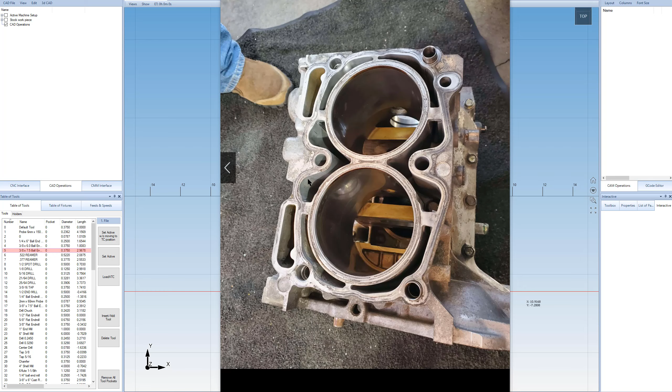So before we talk about how to program the 2D geometry, let's show one common way that's probably easier to do if you have a machine and a probe, but may not be as flexible.

And that is to probe - basically put the tool inside one of the water jackets and just tell it to probe on the XY plane, and it'll go around and collect points along there.

So that works. Basically what we do is insert the instruction called probe profile, and then we select the probe that we're going to use. We'll just select that one.

And let's just open this up here. Okay, and it's all coming back to me now.

So what we have to do is come over here to the 3D CAD and make a sketch. Our 2D sketch defaults to the XY plane, so we can leave that alone actually.

We could position this in some other location if we wanted to, but the standard XY plane is okay for now. And then we come over here to our point consumer, click on that, and we are going to put this into a 3D CAD sketch.

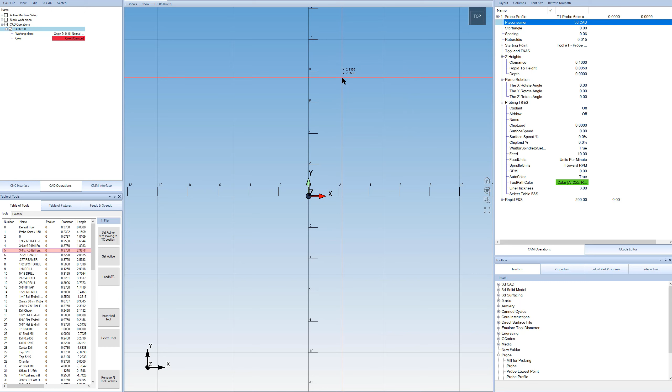So we click on the 3D CAD, then we click on options, and this will allow us to decide where we want to put it.

We'll put it in that sketch 0, which is what we just created over there. So we hit OK, then hit OK again, and now you can see that the point consumer is sketch 0.

So just to briefly explain what point consumer is and all of that - you have a point producer and a point consumer. Clearly we're going to probe, so the probe is what's actually producing the points, and the sketch is what's going to consume the points.

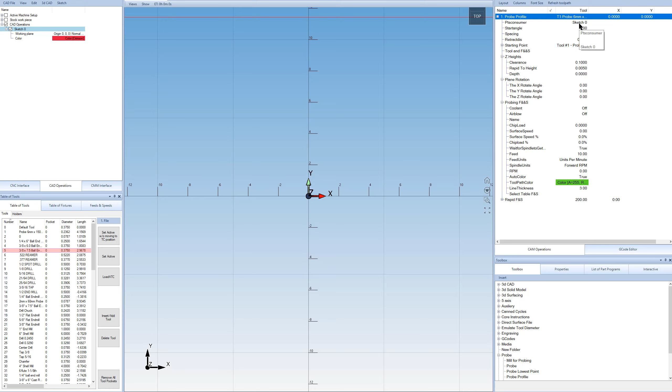So the probe, again, is the producer, and we just have to tell it who is going to be the consumer. If you think about it, this is kind of a nice way that you can connect any point producer with any point consumer, right?

So the sketch doesn't know that the data is coming in from a probe. It could be coming in from any other source or any other producer. I talk more about this in detail in other videos, so we'll leave it at that for now.

And then after this, all we have to do is just move the probe into one of the water jackets, and then tell it where that location is that we want to start, right?

So probably our deck surface is going to be 0 in Z, so we don't want to change that. And then we can just change the XY around to wherever the center is of that water jacket.

And then once we get that, we can just hit cycle start. And then every point that it probes, it will basically just go around the profile and probe 360 degrees around.

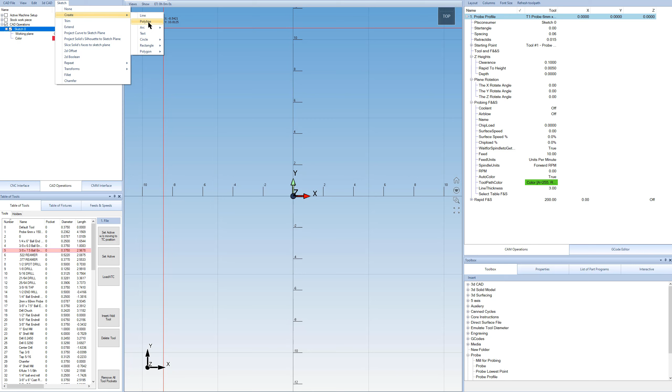And every point that is produced will then just go into the sketch, and it will actually probably insert it as a polyline, I believe. So then you just have a continuous line that's just a series of points basically. Okay, so now let's go ahead and talk about another way to do it, which is actually to program this data directly.

So let's come over here to 3D. Let's go ahead and make a new sketch again, and let's just look at our picture here. What I would probably do is set up my XY0 in the center of the two cylinders, so that's the X direction in the center of the two cylinders, and then the Y direction also in the center of the cylinders. The only reason I'm doing that is to make it easier to mirror things. Basically, the whole block is going to be mirrored over 0 in X and 0 in Y.

You could pick one of the dowel locations, which is probably better. We would probably do all this work at 0,0 in the center, and then maybe move it to make our origin over top of one of the dowels. But that's a detail, it's just not that important. For now, we're just going to pick the center of the block to make it easy.

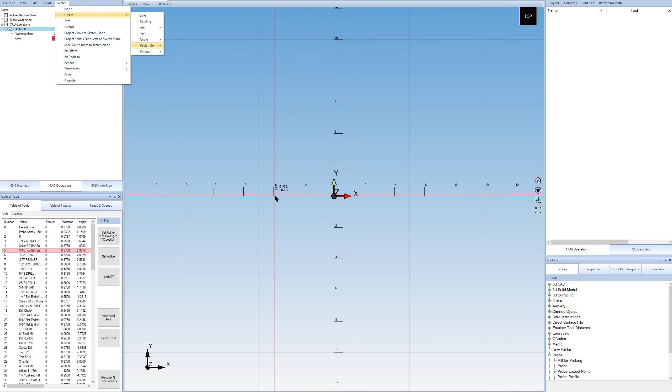So I'm just going to program some of this geometry. I'm not going to get anything exact because I do not have exact dimensions. I'm just going to kind of guess on some of this stuff. So we're going to make a circle. We'll come over here and just kind of drag to -4 in x and +4 in x, okay, and just make 2 circles. So that gives us 2 circles over here.

So we'll go ahead and type in exact dimensions. We'll do 0 in y and something like that, and then we'll make the radius 3... I don't know, we'll pick 3.5, okay. And I know these blocks are all going to be metric these days, but I'm just going to do everything in inch for now, just because we're trying to explain the concept here.

So now we'll make 2 more circles. We'll make one kind of down here like that, and one up here like that, and again we're just going to make these mirror images of one another. So we'll do a 0 in x, okay, and we'll do -3.5 and +3.5. And the radius, we'll go ahead and make it 1/2 inch radius. Okay, so now we have something that hopefully kind of looks like our 2 cylinders and these 2 head bolt holes.

So we'll come over here and just name this sketch. Let's call it cylinders and head bolts, okay. And now we'll make another sketch, and that's going to be sketch 1 down here. Now we're going to say water jacket geometry.

So what I'm going to do is start off with the information from the previous sketch, and the way we do that is we will say project a curve to sketch plane. So essentially—oops, hang on one second here. Yeah, I had the wrong one selected, so I have to make sure that I select the one that we want to work in. Had I left this one selected, then we'd be still creating geometry in there. We want to definitely select our water jacket geometry, and we say project curve to sketch plane.

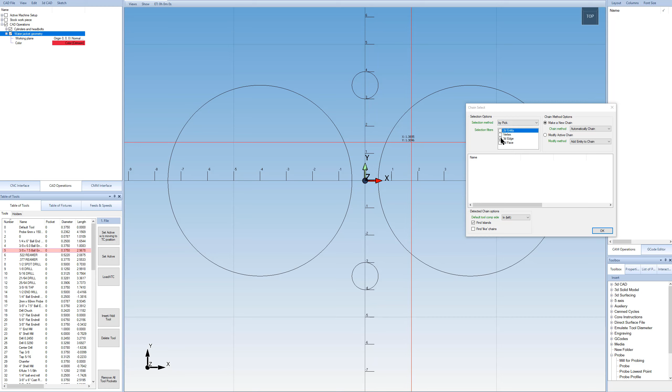And this is almost exclusively used when we're projecting 3D geometry to a 2D plane. So it defaults to only a 3D edge we're projecting, but here we're taking 2D geometry and using that, so we have to just make sure we click on the 2D entity option there. And then we're just going to select our geometry.

Okay, and I know it's kind of weird because now we have essentially 2 copies of the same thing. Right, so if I turn off both of these, I have nothing on the screen obviously. If I turn on the cylinders, it's identically the same as the water jacket locations. But we're going to modify this a little bit for the water jacket.

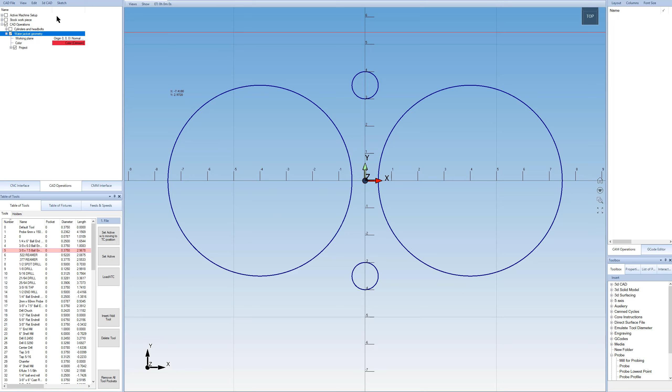So we're going to come over here and just say a 2D offset, and we're going to offset all 4 of these. And let's just say that we're going to offset that a 1/4 of an inch, I guess—let's go a little more, let's go 300. So essentially what that's saying is, since this is going to be the geometry that we're going to create the water jackets with, that's how much thickness we're going to leave between the cylinder and the water jacket. Okay, so kind of imagine maybe 300 thousandths in there, something like that.

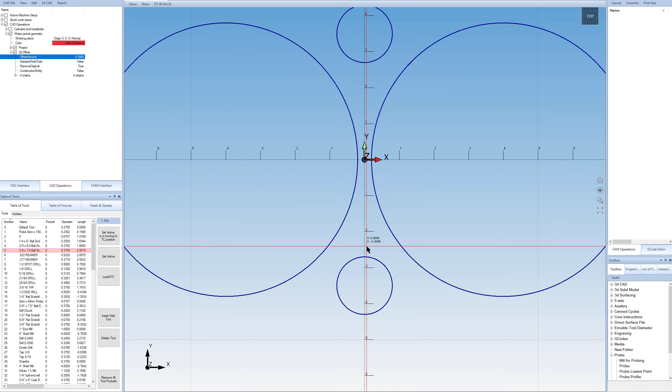Okay, so now we can just go ahead and start creating some geometry here. So maybe I jumped ahead a bit - I want to explain that we're going to program this center water jacket to start off with here.

So if we look at where this starts over here, it's just a little bit to the right from the center of the cylinder in the X direction. I know this is a little confusing - our picture is oriented 90 degrees relative to our drawing, but that's okay.

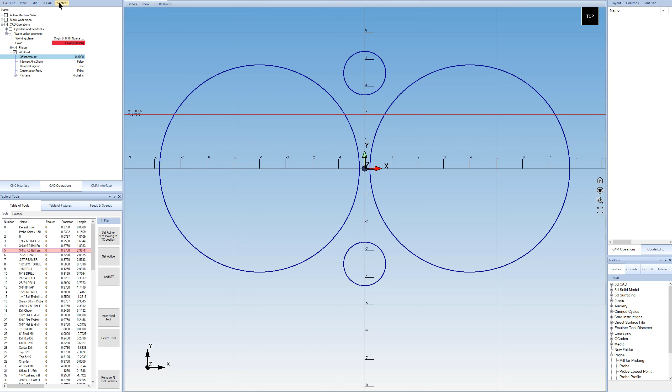So we'll come over here and say create a line and do something like that. I'm just kind of faking it, coming up with something that's sort of close. And we'll make another line over there. So that represents this, although that's kind of on an angle - that's okay for demonstration.

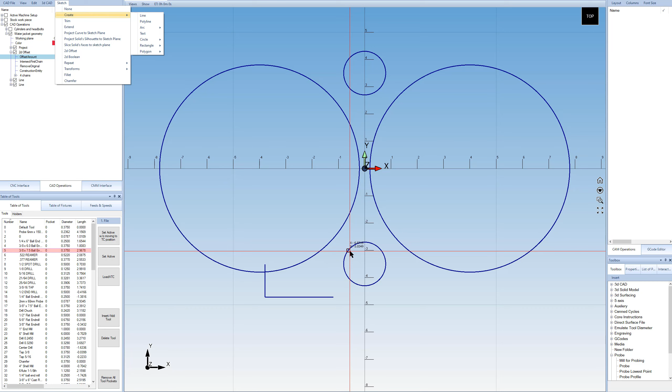So now, if you notice when I hover over top of a circle, it gets a point that's on that circle, and then if I click one line, you can see we're making a tangent line to that circle. So we'll click on that and then click right over here. Okay, that's good for now.

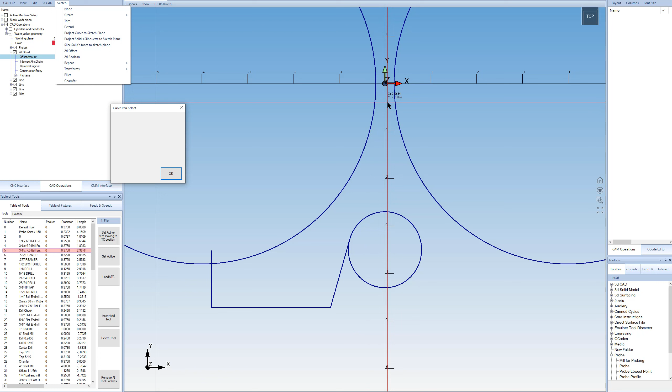Let's go ahead and insert a fillet. Let's change our fillet radius to 1/2 inch and put a fillet in right there. Okay, that's good.

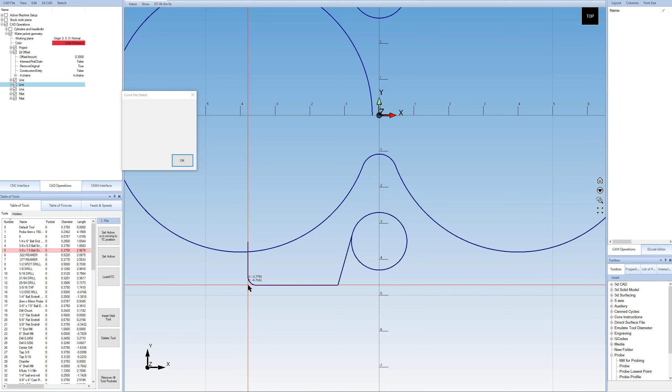And let's make another fillet that is going to be smaller - this will be like a 1/4 inch fillet maybe. And just do that right there and right there. Okay, so that's good.

Now let's do a trim. Let's trim out some of this geometry that we don't need. We'll leave this half for now. And actually we don't need this circle at all, so we'll just go ahead and get rid of that.

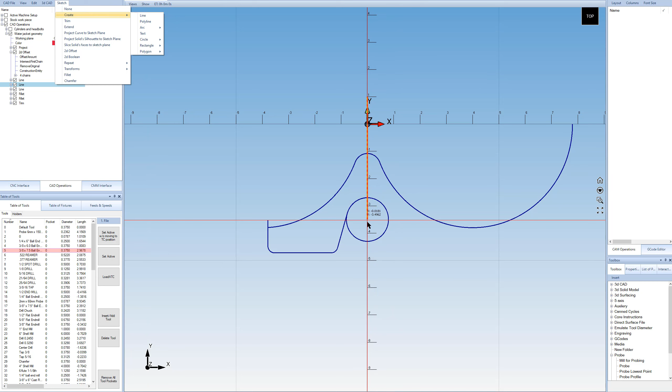Okay, so now I'm going to create what's called a construction line. Essentially this is just a line that's not really part of our geometry - it's used to help us create our geometry. So I'm just going to make a line that is at 0.0 in X. And what this is going to do is allow us to trim our entire drawing to only keep what's on the left side.

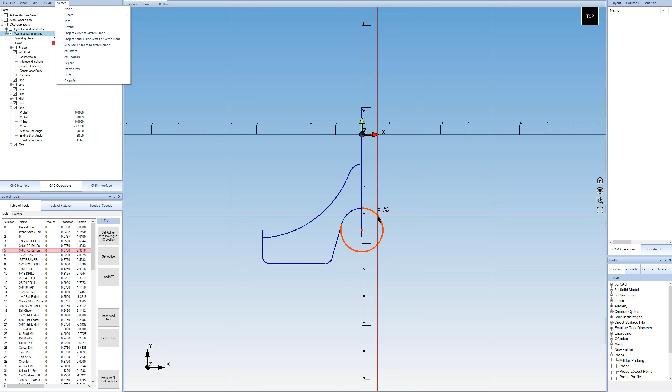Okay, so we'll trim and just trim this away, all of this, and most of that circle there. Okay, so now we have something like that. And now we're done with our construction line, so we can just get rid of that. That looks good.

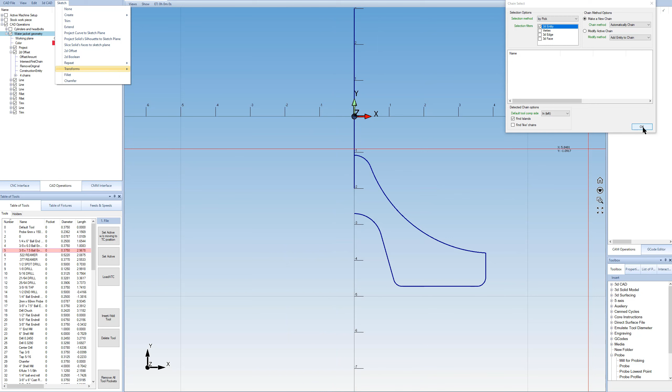So now we'll come over here and do a mirror operation. We click on the mirror, and we'll just click on that right there, and you see that mirrors it over. There's an option inside of the mirror - quite often you want to remove the original, but in this case we want to keep both sides. So there you go, that kind of looks like our water jacket.

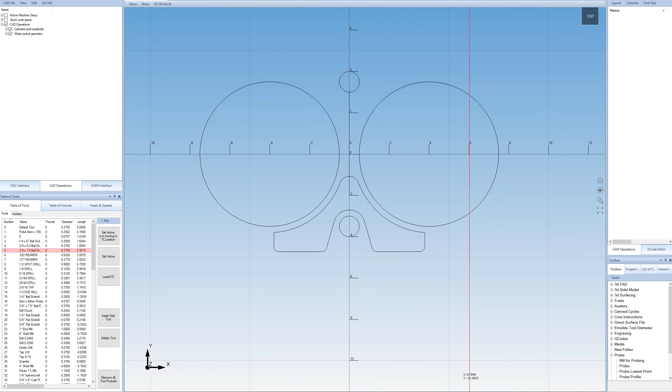Okay, and let's turn back on our cylinders there. So now I'm just going to jump ahead - we're not going to worry about these other locations. Actually, let's go ahead and do this top one because it's easy. We already have the geometry done, all we have to do is mirror it over.

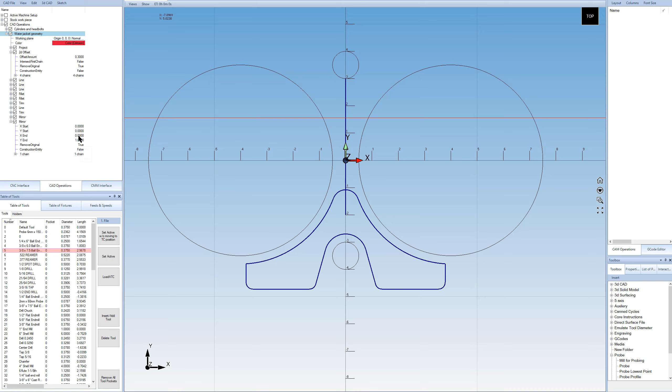So let's do mirror again, and then just select any of these here. In our second mirror operation, we're basically defining a line that we're mirroring over. So we're going to change the x to be 1 in the end, something like that. Now it's a little confusing, but just imagine it actually draws that line there.

You can see this is drawing a line from 0, 0 over to 1, 0, so in this direction in x. So that's our line that we're going to mirror over - all of our geometry just gets mirrored over top of that line.

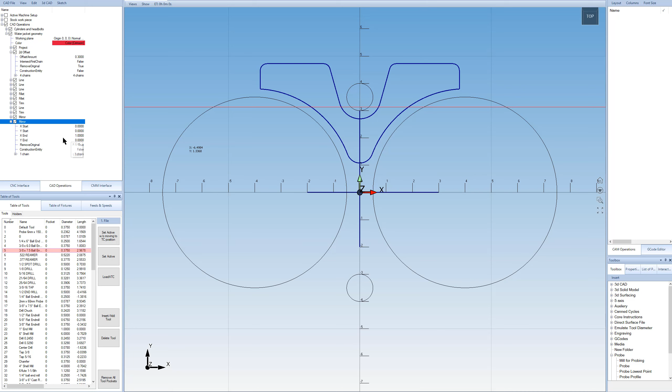And we'll probably improve this to make it a little bit easier to select that line that we're mirroring over, but for now it's not that complicated - if you understand it, you can definitely use it. And then of course we don't want to remove the original again.

Okay, so now we're going to move this into the 3D world a little bit. I'm not going to program any of the outside details here, because we simply don't need that to make these inside inserts for this application. So on the cylinders and head bolts, I'm going to make a 2-corner rectangle that goes around the whole thing, representing the outside of our block. We could fill that in with more detail, but we don't really have to.

So then I'll come over here to our 3D area. First off, we have a decision to make: do we continue working in 2D, or move into the 3D world? I just like to go into the 3D world—it makes things easier, I guess, and you can visualize things better. So I'm going to do that. You could skip this and just do everything in 2D.

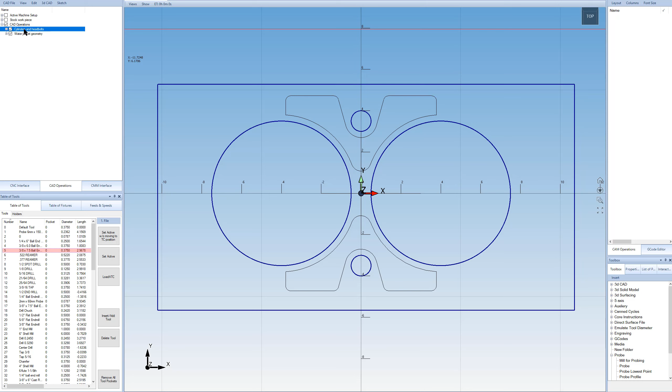Let's go over here and extrude the 2D sketch into 3D. We can click on the outside there, and now we get everything that was inside our cylinders and head bolts. Yeah, that looks good.

So let's make that extrude a little bit bigger—let's just go down 5 inches, something like that. And let's extrude out our water jackets.

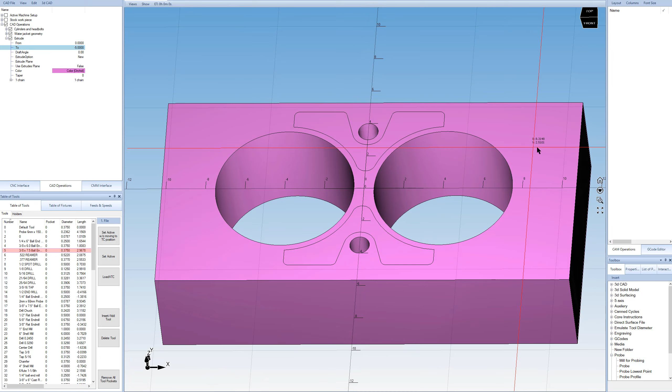Now, if you notice, it didn't pick our water jackets to leave those removed from the block. That's just because it's in a separate sketch. Typically you'd want to pick everything inside the same sketch that you're extruding from, so we have to explicitly tell it that we want to extrude these water jackets out. We'll click on that and then click on this.

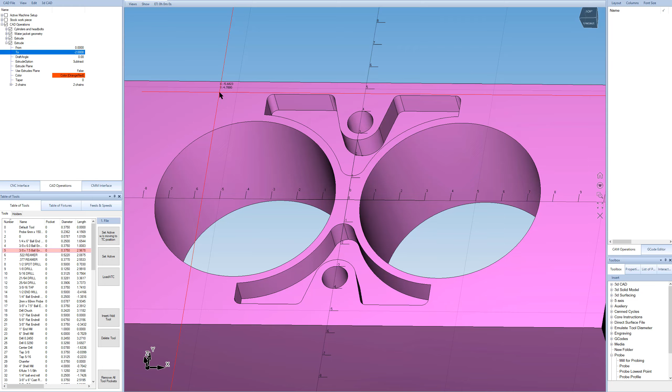Okay, and now the second extrude defaults to new, so we're going to change that to subtract. And yeah, that's kind of cool—see, this doesn't go down all the way, so we can decide how far down we want to go with it. I don't know that it really matters, but we'll leave it at 2 inches there. Okay, so that looks good.

So let's organize this a little more. Let's add a new part folder. We're going to say that this is the block, and we'll take these two extrudes and move them inside our block folder using move into folder. Then we can just turn our 3D on and off.

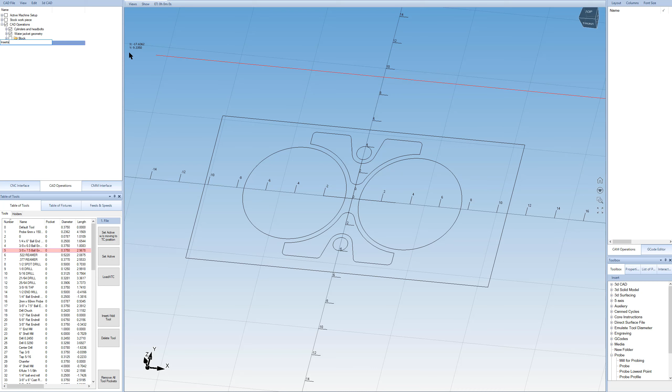And let's make another folder here, and we're going to say this is going to be our inserts. Then in our inserts folder, we're going to again do another extrude and select this and this. So now we have our inserts in one folder and our block in the other.

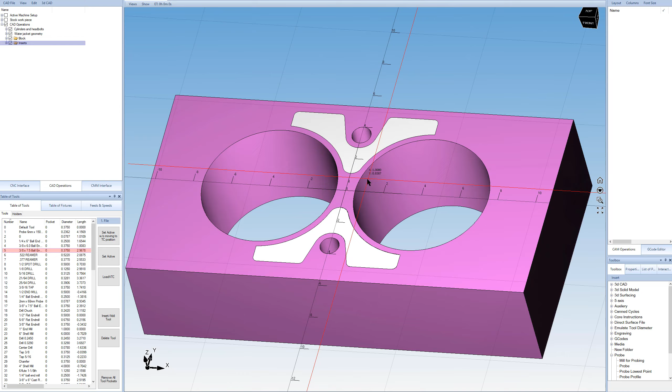So now we can actually just make these—you know, for the inserts, we might not even want to display two of them. We might just want to display one, because we really only have to program this one time. And since it's all mirror imaged, we can use that same program to cut this one out down here. Okay, so I'd say we pretty much have all of our geometry done.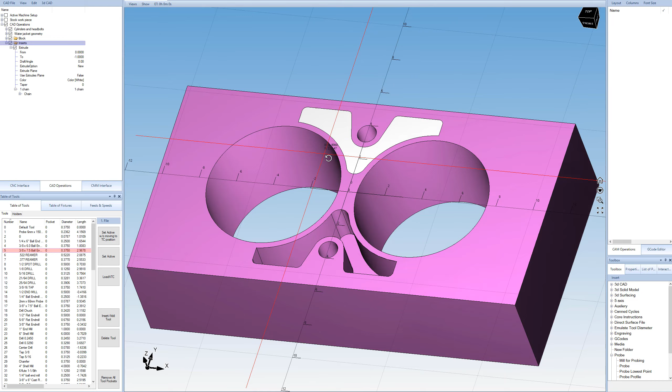We can move on to making a toolpath and then cut this. And before I move on, I'm going to make sure we save this—always want to save.

The left side of our screen is where our geometry and CAD work is all done. Then the right side is where we make our toolpaths. So let's insert a pocket instruction, and then we'll pick this 3/8 tool right there.

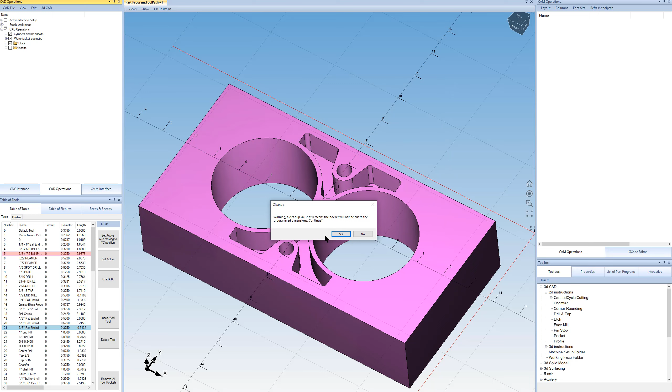Okay, so we open our pocket instruction up, and then under Chains to Machine, we just click on that. And then we'll pick this bottom face right here and this bottom face right here. And let's just go ahead and compile and see what we get.

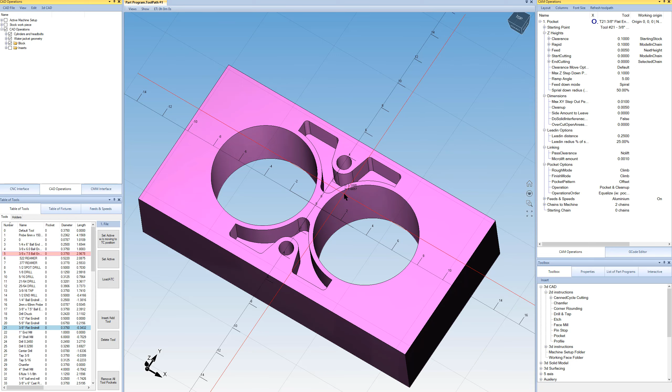Yeah, so we've got a lot of toolpaths here. Let's look at some of our default values. Our max step out of 10 thou is crazy, so we'll make this 150 thou. And then our max step down in Z, instead of 100 thou, we'll make it 1 inch. Now let's see what we get. That's more reasonable. Okay, that looks good.

So let's come over here to our toolpath simulation and just watch it go around, and that all looks good.

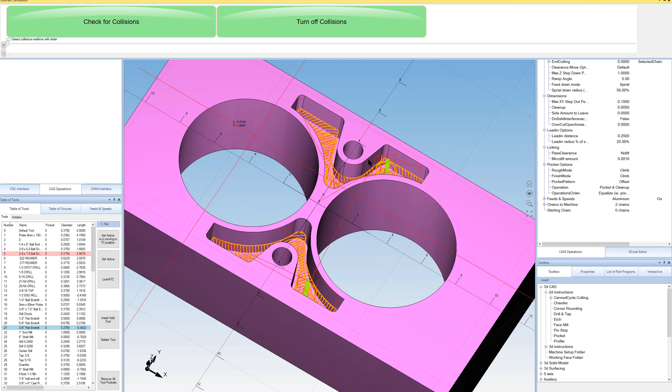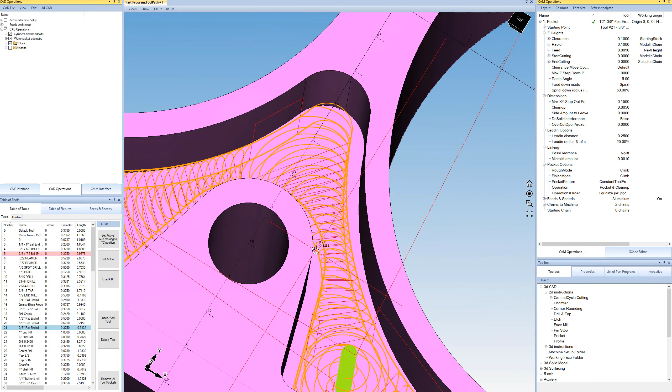Okay, so that's good. Now one thing we might want to look at if we're having problems cutting is the type of pocket, the pocket pattern. Changing to constant tool engagement can help in a lot of cases. It's kind of the industry standard way to cut these days, and it makes a strange toolpath, honestly, but it really helps with a lot of the details of machining.

Okay, so that's good. So we basically just push cycle start and it would cut. So let's go ahead and comment that out.

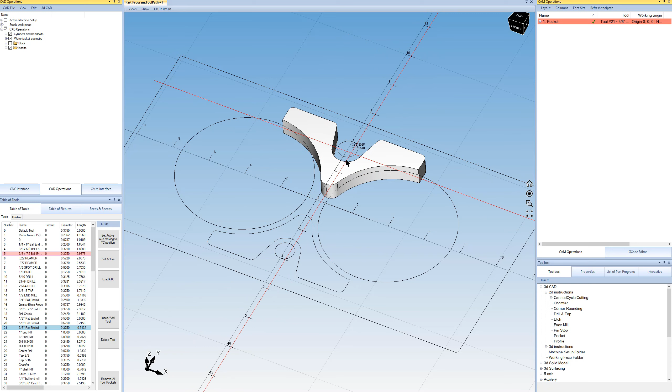And we can turn off our block and turn on our insert. Now, the insert's a little bit different because we're working from the outside in instead of from the inside out, because we're leaving the insert here. So if we look at our stock workpiece, if we turn that on, we can see that it has selected a stock workpiece that's around everything, including our block.

So we could have gotten around that by making our water jackets in a completely different CAD drawing. I won't go into details of how you do that, but it's in the list of part programs over here. We can make a separate CAD drawing in the same file. But it's okay for right now because we don't really need the outside starting workpiece for anything other than the insert. So what we're going to do is create the starting workpiece that we're actually starting with, instead of letting it auto size the starting workpiece.

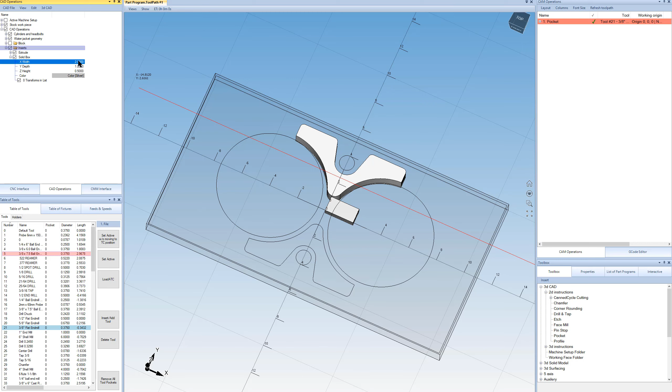So we'll say create solid, and that's going to be in our inserts folder here. And let's just tell it we're starting off with, say, a 6 by 5. That doesn't look quite right. Let's do 8 inches here. Okay, and then our Z height, say that's going to be, I don't know, 1.5 inches. Let's change our color here so we can see the difference.

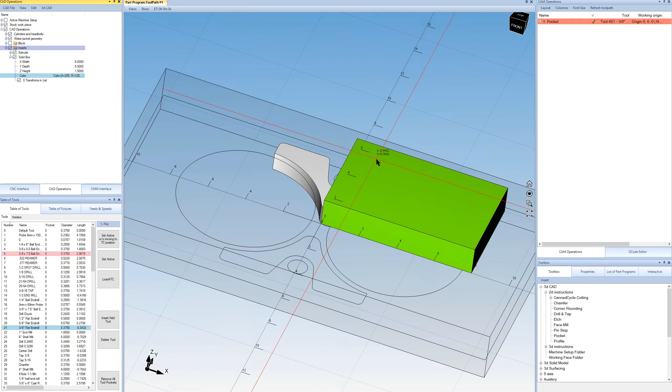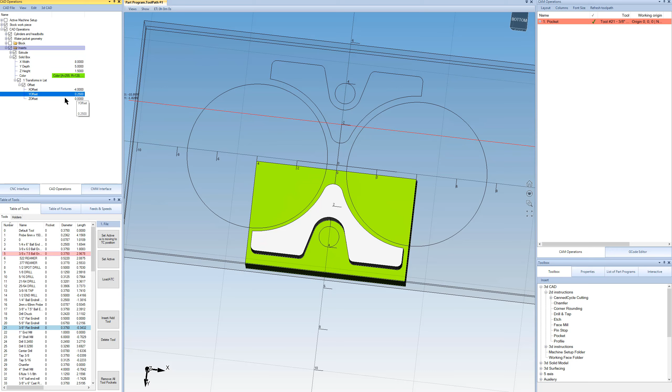And then, so that's a good size, but it's in the wrong place. Okay, so we're going to want to come over here and say transform that and add an offset, and we're going to move that half of the distance in X, and then in Y we're going to do, say... oh no, not that much, maybe 1/4 inch actually. And then in Z we'll just go down, say, -1 inch.

Okay, so I guess that looks okay. Let's go down -1.25 actually. Okay, something like that.

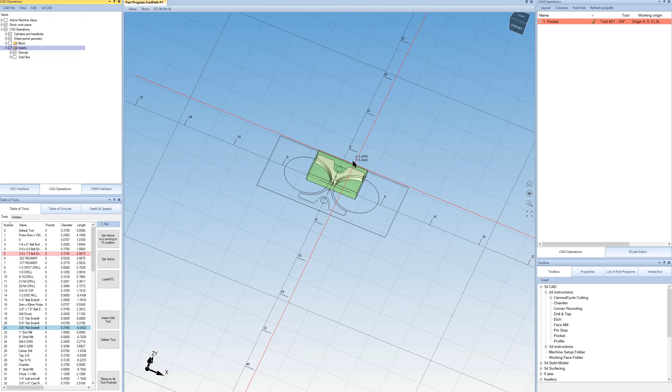So now what we can do is right click on the solid block and say set as starting stock. Okay, then we can turn that off and we can see that our starting stock now uses that block that we just created. So now when we make toolpaths, it's going to use that starting stock instead.

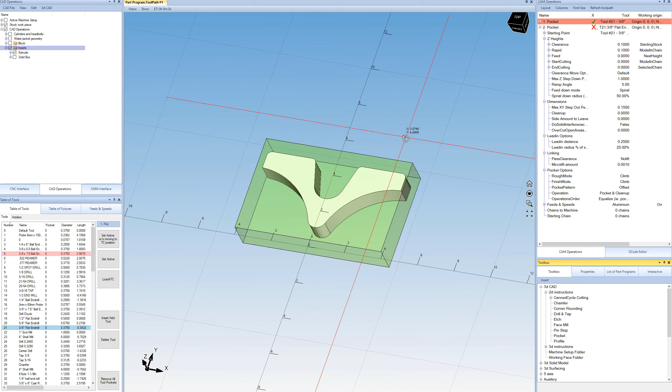So let's do that, do the pocket again. We'll make a pocket, and we're going to pick our 3/8 flat there. And notice it defaulted to all these really small values again. What I'm going to do is, since we kind of have a template set up with this pocket, I can right click on it and say set all template properties for this tool. Okay, so that takes all the important values here and associates them with the same tool that we're going to use, so next time I create a pocket and use that tool, we don't have to go in and insert all those instructions again. Our 150 thousandths is now in there, and the Z step down as well.

So now that's easier. We can click on chains to machine, and now we're just going to machine down to that edge right there. And if I hit OK, this should start. Yep, this should start from the outside, from our starting stock, and work its way in. Okay, let's simulate that real quick.

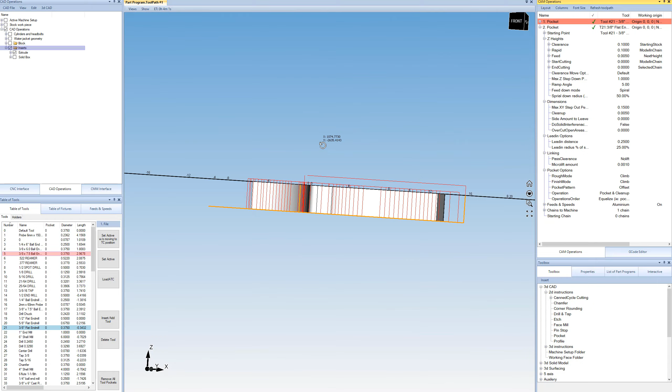Okay, so that's pretty much it. Hope that helps.